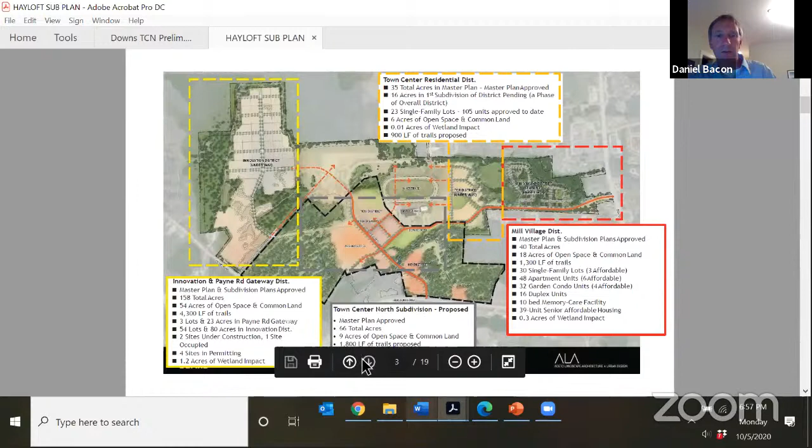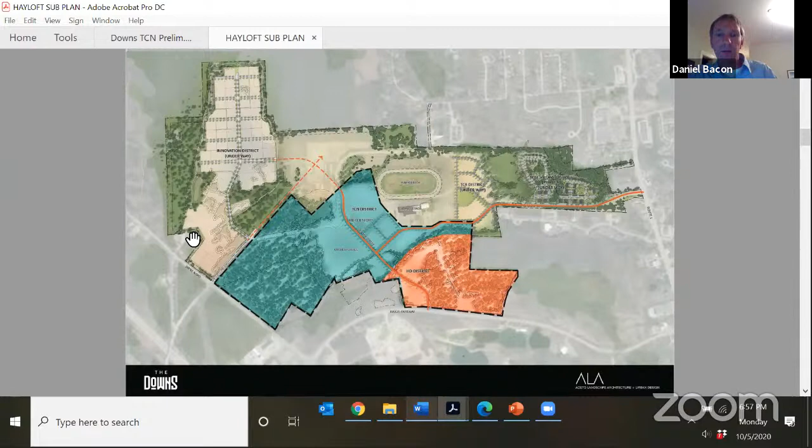I think overall, we're talking about a portion of the Haigis Parkway District Plan Development Area and then Town Center North, like we just talked about. So I'll move quickly through that. This is the conceptual master plan for this area of the project that you saw back last spring and that we talked a bit about a few minutes ago.

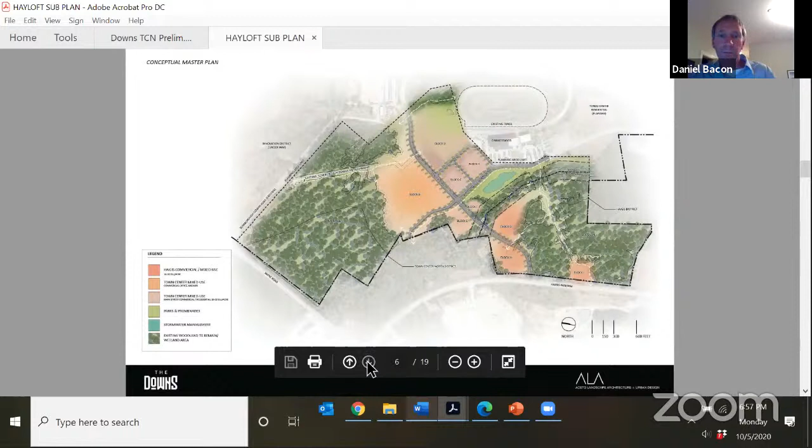Like this project is the case in other phases, and it's really needed as this project moves forward. It's very much a phased approach to everything, given the significant infrastructure costs and the fact that we don't have the entire plan development districts figured out in terms of final design.

So this shows you within the master plan the area we're proceeding with through subdivision, which is a phase of both of these districts, as you know. If you can see my hand, this would be the new Center Street that would be constructed from Haigis Parkway. It would cross this area of the Haigis Parkway district within the Downs. It would provide access to these two lots, 5 and 6.

It would cross Willowdale Brook with a stream crossing here, and then it would come to a new intersection with the Downs Road. So the Downs Road would be extended up from Town Center Residential, which is where my hand is. That's really where it's finishing off, and that's under construction right now. The Downs Road would be extended up generally along the alignment of where it exists today in front of the grandstand, or along at least a portion of the grandstand parking lot and where you think of the grandstand out there. And then it goes off alignment to come up and intersect with Center Street.

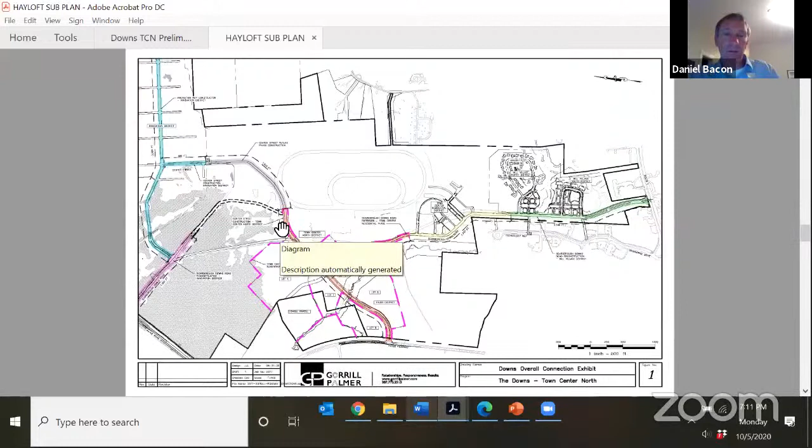So that's the intent here, is to get this far enough to provide that in the short term. We're hopeful we're back in front of the board with some end users in this area sometime in the future to complete that public street. So I wanted to provide that explanation.

So I think with that, I'll turn it to Drew. I think I covered the items that I wanted to cover. And Drew, if you want to jump in on your piece. Yeah, thanks, Dan. Drew Gagnon with Gorrill Palmer, project engineer for Gorrill Palmer and working on the Downs project here. I'm going to be brief, realizing you guys got a relatively large agenda tonight, and you've probably heard this spiel before, but I'm going to touch on the utilities and the stormwater aspects of the project.

So Dan, if you could go down to the utility sheet, I think it's 2 down from where you are. Maybe 1 more. There we go. This is a colored exhibit showing the proposed mains for water, sewer, and electrical that we're proposing in Town Center North subdivision.

Starting with the water main, we're going to continue the 16-inch main, which was recently approved and is under construction in Town Center residential subdivision. We're going to continue that north along the Downs Road and up into the Downs and Center Street future intersection, which is in the middle of those 4 lots that Dan's been talking about.

The water main is going to run northeast along Center Street, up the road towards the outer track where Dan's hand is showing. And at that point, it's going to become a cross-country water main. Now, we've been working closely with Portland Water District on the logistics behind this. And the main reason is creating a looped connection from Route 1 all the way to Payne Road with a 16-inch water main.

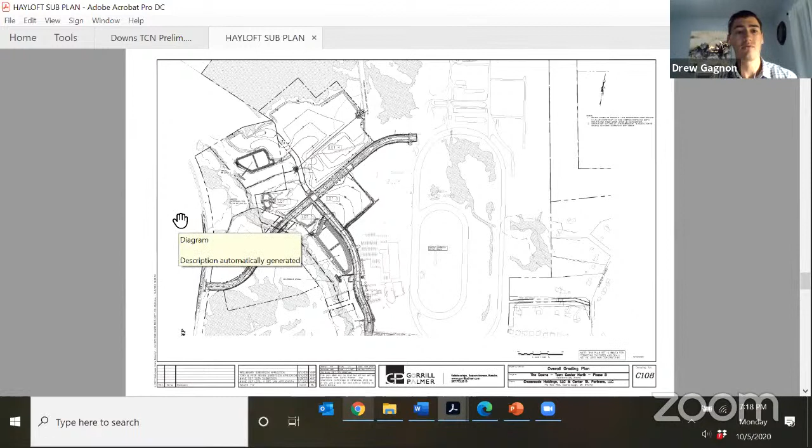I've talked previously, I think back in February or March, about the bypass system we've been working on with the town and DEP. This bypass system takes, during what I'm calling the melting period, November to May, the first inch of runoff, which has high chloride contamination, and we're flushing that around the BMP and directly into Willowdale. That flushes Willowdale with chlorides at one time, versus it seeping into the groundwater and bleeding out into the stream throughout the year.

So we have a system of weirs that will promote the flow either around the gravel wetland, or during what I'm calling the summer months between May and November, where it acts as a normal BMP. The cleaner runoff, the non-chloride, non-salt concentrated runoff, will mitigate with the groundwater in these gravel wetlands and help recharge the groundwater, which eventually gets into the Willowdale Brook. This is consistent with what we've been working on with the DEP and the town to help the Willowdale Brook corridor.

2 additional BMPs we're proposing are grass under-drain soil filter 1, which is right on the side of lot 5. That takes only the Center Street right-of-way, exclusively, just in order to get the road in and get that road treated and stormwater handled.

The second one is grass under-drain soil filters 2A and 2B. I think it's actually really 1 BMP. That takes lot 1 specifically and only lot 1. So that's kind of how we broke it up.

A large drainage culvert across lot 4 is proposed. This culvert is going across the Wex site, and essentially it's taking existing flow from the large wetland north of lot 4, which is a big area - we're talking about 60 acres or so. There's flow down to a ditch that goes to the tributary stream to Willowdale Brook. So we're putting development on this lot, and instead of running it grade-wise with ditching around the site, we're proposing a 48-inch culvert to get that existing flow through the site. That's not taking anything we're proposing, it's essentially just moving the ditch.

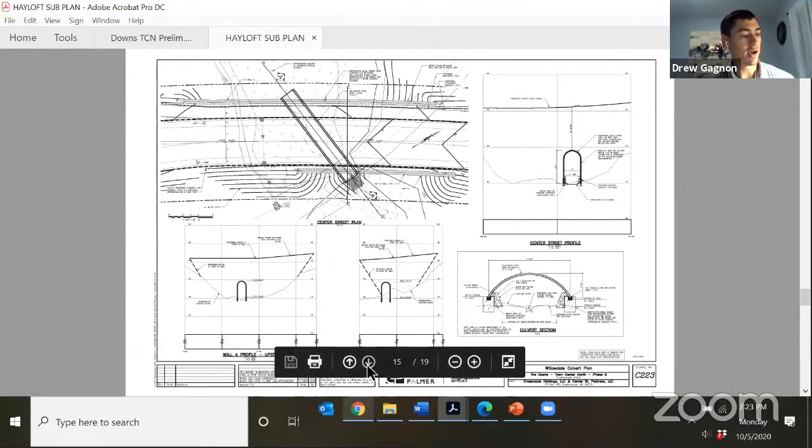Just wanted to give the board and the town an update on the Maine DEP and Army Corps permitting. We've had our stormwater reviewed by a third party, and there weren't any comments, so we feel comfortable with that, and we've been working hard on getting that reviewed in a timely manner. We responded to the first round of comments, and that is right now with the project analyst - we responded two weeks ago, so that's under review for the level 2 portion of this permit, which is essentially a site law. For the Army Corps and NRPA, we responded over a month ago to the first round of comments, and that is also under review. With that, I'll pass it along to Tom Errico - he's going to talk about some of the transportation and traffic engineering we have on the site, and then likely back to Dan. So thank you.

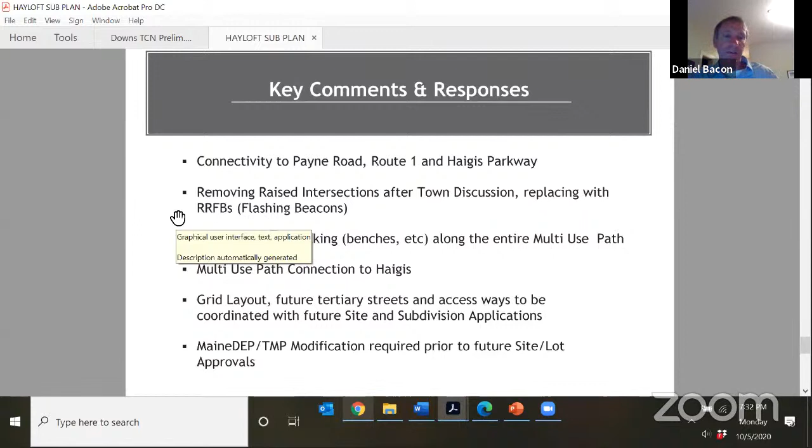I think you covered most of that, Tom, in your presentation. I probably should have switched slides. As indicated, we're in the middle of the TMP modification and are working hard on that with town staff, DOT, and the peer review folks for the town.

So in terms of next steps, we've been talking a while. I want to turn it back to the board. Obviously, ongoing traffic coordination—we're pretty close on Maine DEP with their review, and we're going to have a permit later this month. They're on the early side in November.

The critical path for us is that we're doing this to activate this area of the project and enable WEX to proceed with more site programming. Based on policy and practice, we can't apply for site plan review and progress the WEX site design without a preliminary level of subdivision. So that's a step we were interested in this evening to enable WEX to continue on.

We know we have a lot of things to address that are more outside of the limits of the lots and roadway configuration, and we're hoping we can do that between preliminary and final. So with that, I'll turn it back to the chair and the board for discussion. Thanks, Dan. Appreciate it. Rachel, would you like to start?

Sure. I'm still struggling, at maybe a 25,000 foot level, with the roads—in terms of what's going to happen when. I believe we talked early on about the point at which Scarborough Downs Road would be closed at a certain time, and a new road opened up between Payne Road and the development area.

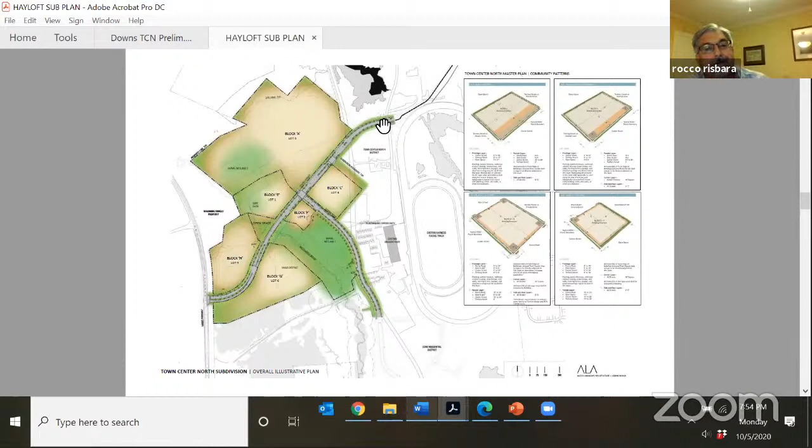Not to say that, if this board or staff feels that a better cutoff is better, we certainly can have a conversation. But we put a lot of time into thinking about how do we eat this elephant, and how do we take it off a bite at a time. I hope I've added some clarity there. I'm not sure I have. Maybe I've just been rambling, but I appreciate you listening to me.

Yeah, I also had a question about potentially, let's see if I can explain this. Does it make sense for you, understanding that you have some other, so it's not just road construction phasing, that you're trying to phase new roads in and older roads out, but certainly the wetlands permitting piece and all of your DEP work comes into play there, as well as you go to transition over this older road into, away from road and over to the path and boardwalk option. So for that short stretch of Center Street between, yep, right there, between those two, I wonder...

Perhaps your phasing plan will help to clarify it, or even seeing it in person. Admittedly, I haven't been out here in a little bit of time, but perhaps having that little connection piece as kind of a future sub-phase of road construction, or waiting to build that until at least the point at which you're closing the current Downs Road to traffic, might help the utilization and mix of existing roads and the roads you have built out to that point not feel like such a dead end. Not such a... and I know in your minds it's not a dead end because you're clearly seeing the connection in the future.

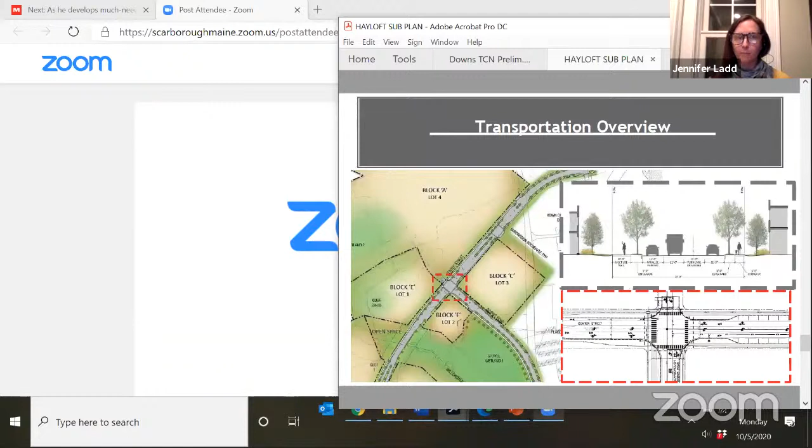Beyond that, I checked what the AASHTO and FHWA guidance is on multi-use paths, and there's definitely strong language that speaks to a minimum of 10 feet for a variety of reasons, all of which I know your team is aware, but for others on the board or any public listening in, that generally has to do with the nature of multi-use. So if you picture someone walking, a dog passing, someone on a bike with a trailer, or any combination of the varieties of ways that we get around and use those trails, it really does require more than 6 feet.

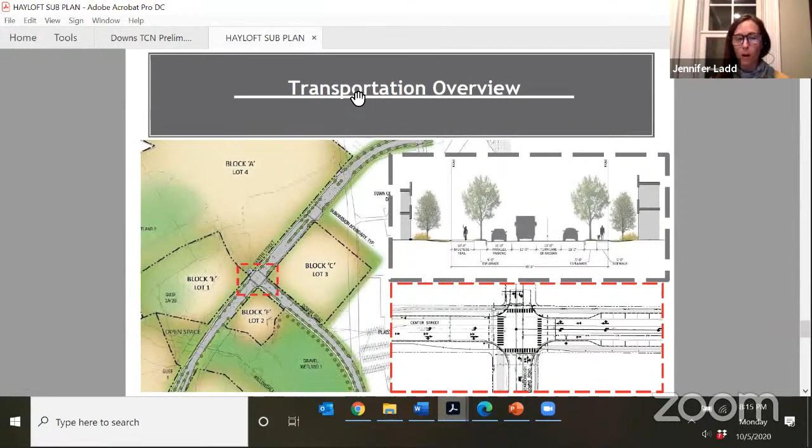6 foot, actually, I read somewhere that 6 foot is the recommended minimum for a one-way facility. And so I would just urge you to continue to look into options to achieve an 8-foot minimum width path where possible, if at its narrowest, 10 foot anywhere else that you're going to be calling that a multi-use path. And then, similarly to some of the traffic projections you've looked at for the roadways, if this is intended to really be an area that encourages by design a variety of modes of transportation - anybody on foot, anybody in a wheelchair, on bikes, strollers, scooters, who knows what - and on top of that, we're envisioning a lot of those people.

10 feet wide might not even be sufficient. These paths, just like roadway build-outs, get expensive the wider that you construct them. But I would urge a look at preserving space for that if we get to that point, which would be wonderful. And if not, just really seeking at the very least that 10-foot width, because I think it's really important.

I think a lot of people are going to want to do that here. I wouldn't even say that if I didn't think this was an area that would be desirable, but I think the rest of your development program and the other cues from infrastructure that you're building and investing in are going to lead people to want to do that.

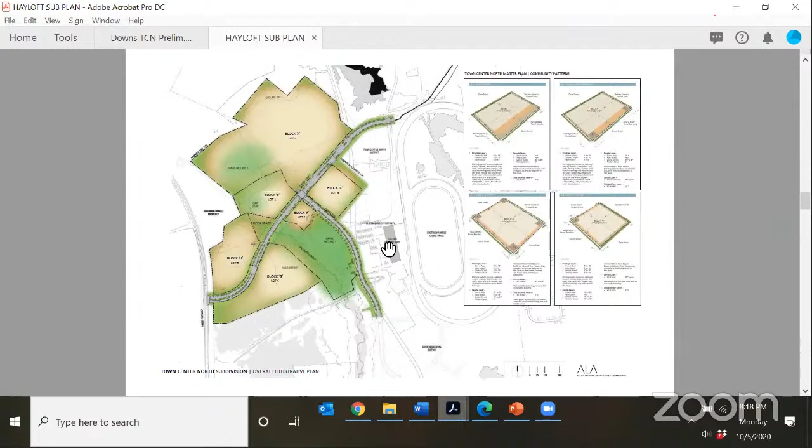I actually thought the applicant did a very nice job explaining what their plans are. I understand what they're trying to do. I think they're fortunate that they have the current Downs Road and the Paddock Road that they can utilize during the construction phase. And I'm not a technical expert like Jen is, but everything seems to make sense to me.

I don't think it's going to be a big problem, that little extension from the existing Downs Road up to the Paddock and then transitioning to the Paddock Road. I just don't think that's going to be an issue. And if it were to be an issue, they could just not develop that little stretch right there as it would be in its final stage with all the landscaping and everything. But I don't know, I think they've done a good job, a thoughtful job, and taken advantage of the existing roadway system to work around everything.

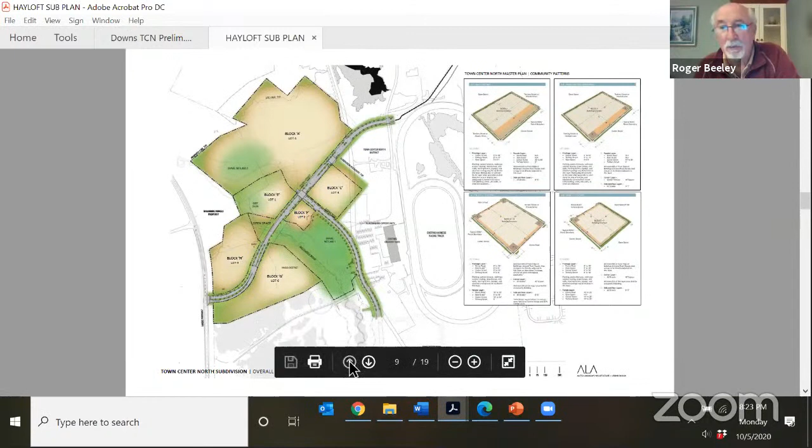So okay, right now though, I mean, I can see from a business point of view, from a business standpoint, it doesn't make economic sense to do it right now until you have something there to be developed. So I guess...

So they are proposing to make a connection, and it's going to be a private connection, not built to street standards, which they've explained why they want to do that, because they ultimately see in the final analysis that there is going to be a more fully developed road.

So all I'm suggesting at this point is we just want to be sure that the town has a good understanding. I think it was the questions that maybe Rachel or Jen were raising about, okay, when in the final analysis this builds out, and it's sort of the town's job to... what the board has before you is this application.

So if nothing else were to go forward, and that's a very unlikely scenario, totally get that, but what would that connection between the end of Center Street here look like, and how would people get up to Payne Road? We generally understand what that connection is, and really it's just about the details. As you sort of said, you're not the details guy, so that's sort of what our questions are more poking at, really, is the details, less the overall concept.

Well, I guess I don't understand. So what are we requiring them to tell us then at this point, what that connection along Paddock looks like? They've already indicated what they expect to happen. I don't understand what we have. I'm missing something then, no?

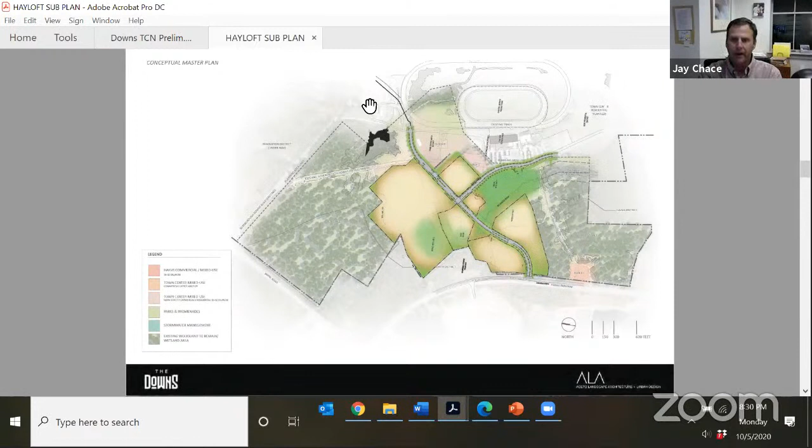I think that speaks to why we need to do the analysis of what the full build out is, so we know what we're headed towards, not take it site by site - to understand what those full impacts are and how we incrementally get those improvements. We've talked about saying, okay, when we hit such a threshold, these things need to happen, hit another threshold, maybe these other elements come in. We don't want to be building for one level and then taking a whole different course down the road. So certainly complicated, without a doubt.

All right, I'm going to give Rick a quick minute here, he hasn't gone yet, but I do want to try to tie this up a little bit. I think Rachel and Jen did a really great job, and Roger as well, so I don't have a lot of questions. Moving forward, I'd like to talk a little more about the placemaking and the culvert, but I think those are all good for now. So I will yield my time back to the chair. Thank you, Rick.

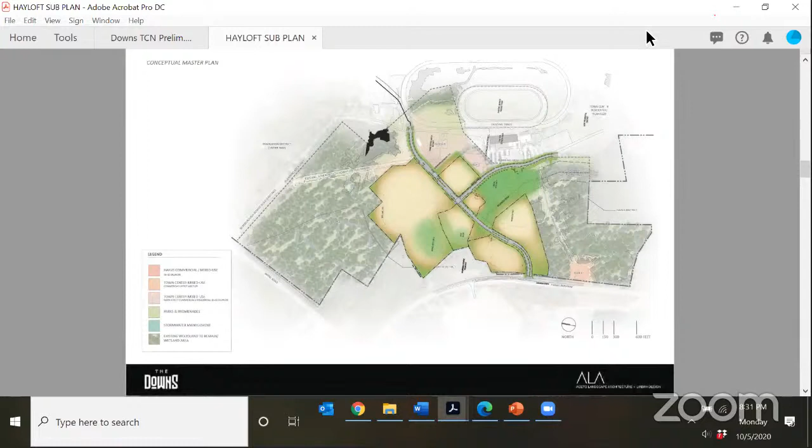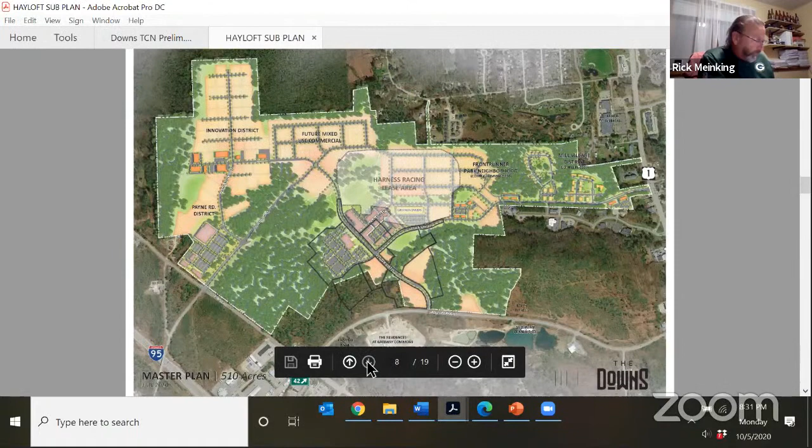I just had one quick question on gravel wetland 1. I see a curb cut, and I'm just wondering what that's going to lead to. You know where I'm talking, Dan?

Yeah, there's a planned curb cut that goes to lot 2. Below gravel wetland 1, we're anticipating a future pump station in that location, and we wanted to show the curb cut now to provide access to it.

And then for access into lots 5 and 6, are you planning on doing that somewhere around where that crosswalk is? Yeah, there's a 4-way intersection proposed just to the high side of that crosswalk, where we're showing access to both of those lots. Okay, that's all I had. Thanks.

So I don't want to jump into a lot of the stuff we've already discussed. I think there's been a lot of good feedback, and a good presentation from the applicant was very helpful. I know you're asking for preliminary subdivision approval this evening. For my two cents, I'm not quite sure we're there yet on tying up the details, but I'm open to anyone else on the board if they feel this is ready for preliminary, or if they'd like to see it one more time. I see a nodding head or two.

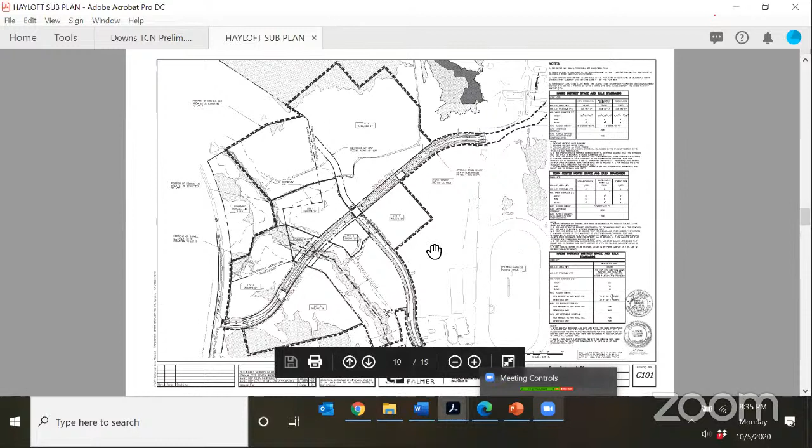Okay, seeing no public comment, I will close that. All right, Dan, Rocky, thanks for giving us this. Good luck, I guess we'll see you shortly with some more detail intact. Thank you. Okay, thank you.

All right, next item on our agenda this evening is Joy Real Estate of Scarborough LLC, requesting a site plan amendment review for 260 US Route 1, Assessor's Map U43, Lot 42. Jay?

Thank you, Mr. Chair. This is an application for the reuse or repurposing of an existing building at 260 US Route 1, just across the street from Town Hall at the corner of Ward Street and Route 1. The applicant is seeking to renovate the existing building to accommodate a mix of uses: first floor proposed as a dental office, with two dwelling units on the second story.

This application was actually on the board's agenda back in September, but got tabled due to the lateness of the hour. But they were able to respond to some of the staff comments, which really helped reduce and modify our memo to you this time around.

Some of the primary elements remaining are discussion around the joint use of parking spaces, where you have a mix of uses on a site. The planning board can approve the utilization of parking spaces by the two uses, so long as they have different time needs.

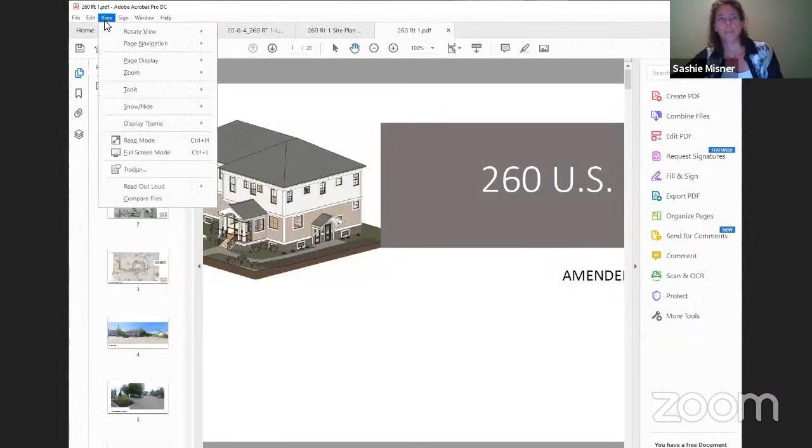So as Jay said, we were on the planning board agenda last month and we got kicked off. So we're really happy to be here tonight. Appreciate that we made it on. We would be looking for approval from the board tonight.

We were fortunate to be able to resubmit and readdress some of the comments. So we're hoping that we've addressed all the comments that are out there and that the board is comfortable with what we're proposing. The site, as Jay said, is directly across the street, so I'm sure you're all familiar with it. I'll just give a little bit of background.

You can see that it's fully developed. The previous use was a church, so the owner is changing the use for office space on the first floor and two two-bedroom units on the second floor.

As you can see from the aerial image, it's completely paved right now. So the owner is going to be doing upgrades to the building as well as improvements to the site itself.

We have Bessie Square on the west side. We have the parking lot on the south. There's businesses all around, so what's being proposed is appropriate.

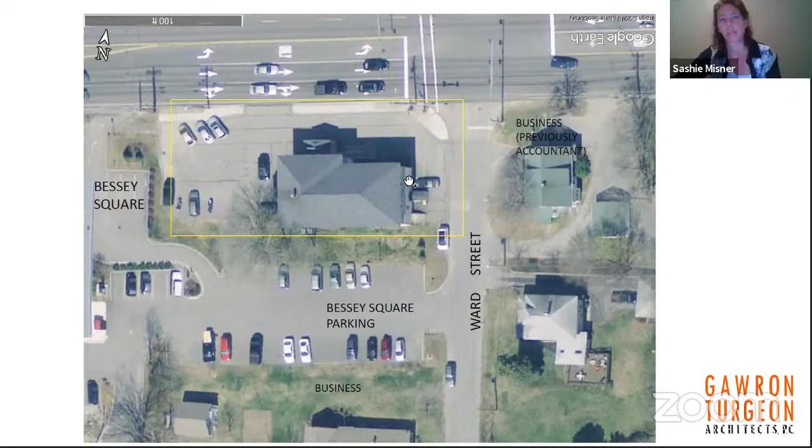Here you can see the utilities are all on - we have overhead electric on Route 1, and then we have all of our utilities coming in off of Ward Street. So everything is there. We're maintaining what's existing.

You can see the extent of the pavement. One big thing right now is that the circulation is a little abstract, so there's no real clear parking spaces. There's excess pavement, which makes it difficult to understand how to use the space. So we're trying to improve the site in that respect.

They have a little bit over a 30-foot curb cut along Route 1. They have an opening along Ward Street. And then they have an easement through Bessey Square to get to the property.

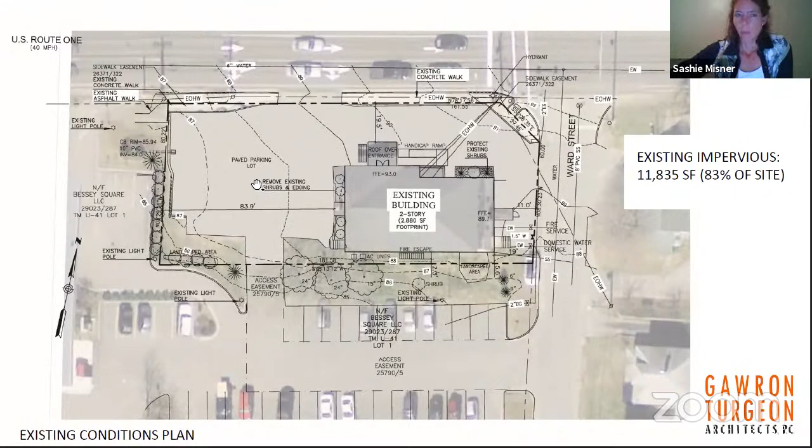This is just showing the access through the easement area here. It's about, I think, 18 to 20 feet wide. And this would now become pretty much the primary exit from the site.

We're trying to improve the circulation through this entire area with our improvements. So this is what we're proposing: we are removing the large curb cut with in and out access, so now it will be only in access. Originally we had a 15-foot wide entrance here, and staff asked us to reduce it to 12. So we're now showing a 12-foot wide access, which works well.

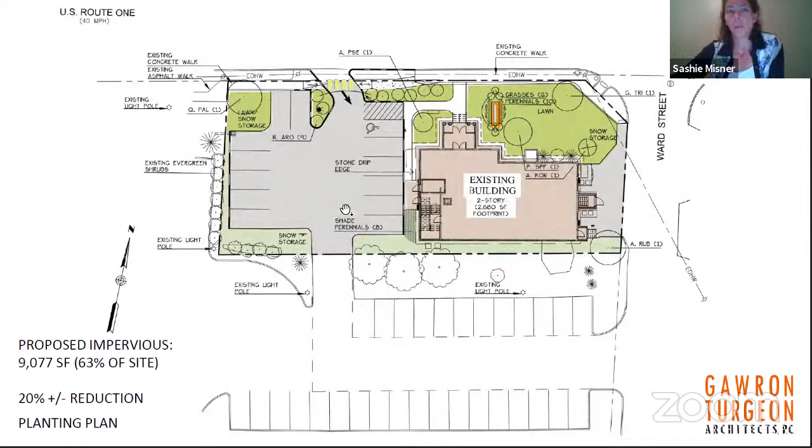And just to point out that we did remove all of the pavement up in the front of the building, so we no longer can drive through here and out to this space. We reduced the pavement about 20%, so we were really happy to be able to do that.

And I'm not sure what the town was thinking we would do there. That's for discussion, I suppose.

As far as plant materials, we did add another tree. We're showing a pin oak right here, which is this tree, and a flowering cherry right in front of the building, which is this variety. We've added a locust at this corner.

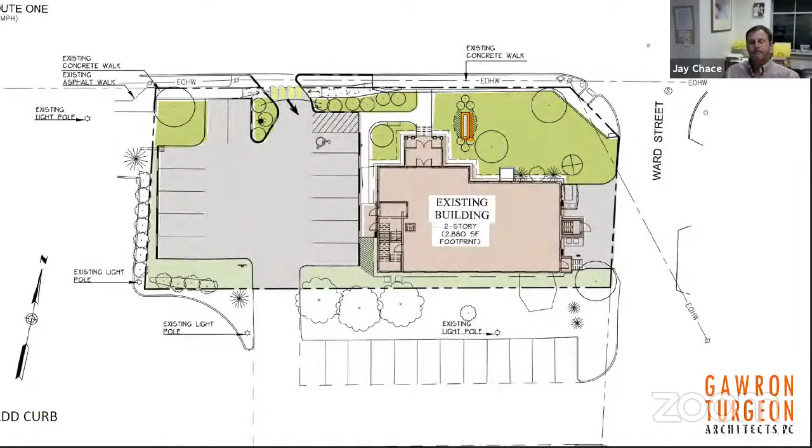Okay, I do have one question. Reading from the Woodard & Curran comments, it said we've been looking for the easement for this catch basin, and there is no easement recorded for this property referencing this catch basin drain. I'm wondering what's going to be required if we're not able to track anything down.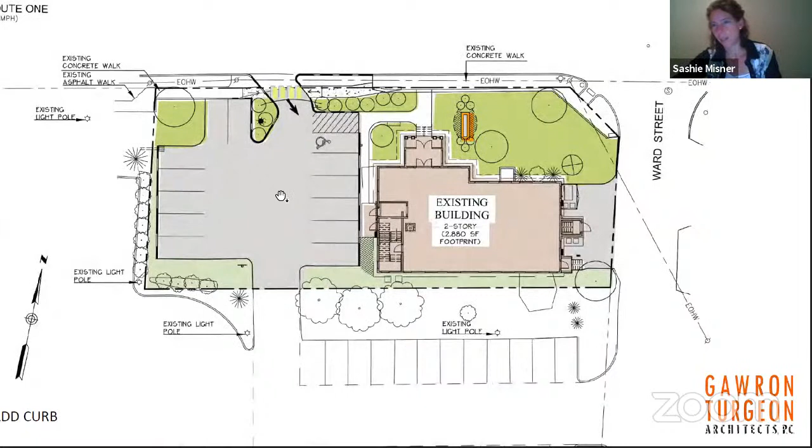I've reached out to the engineer who did the Bessey Square project, because it looks like, yeah, right here, in 2006 this is what this property looked like. There was no catch basin, no curbs or anything. Bessey Square went in, and you can see where they cut the pavement around and installed the catch basin when Bessey Square was constructed.

So this was part of the Bessey Square project, but I have no record of it. I'm trying, in the most economical sense, to figure this out — the applicant has to pay a lot of fees with this project, traffic fees and all kinds of things, so I'm trying to find the most economical way to get him approval and satisfy everything.

So this is the one thing I haven't been able to find yet, and I haven't been able to talk with the civil engineer, but I've reached out to him. I'm hoping to get some clarification, but I haven't seen an easement in the Bessey Square documents, so I'd like to understand what's going to be the requirement for that.

Yeah, do you have any insight on that? I guess my thought is, going back to the Bessey Square proposal and approved site plan, if they were proposing that connection and proposing that grade.

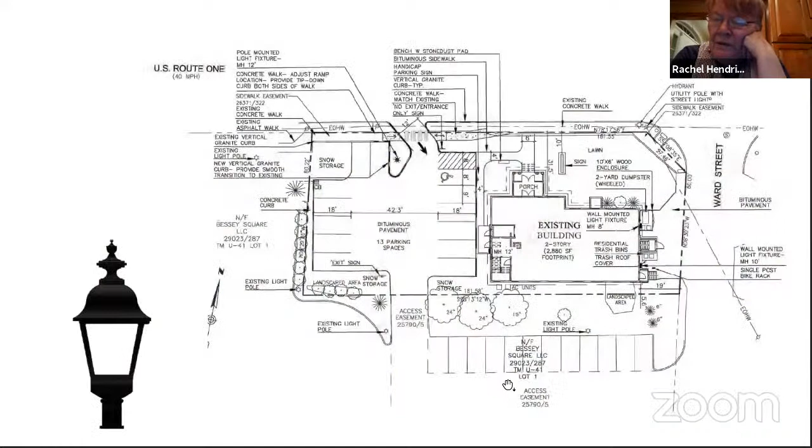While I'm very sympathetic to your desire to save the applicant money, there's actually a fair amount of disturbance going on, because as you pull up the asphalt and then put loam and seed it, there's a possibility that something could go wrong in terms of where the water is going to be flowing. And repaving the parking area, changing the entrance - when you think about it, it's actually a fair amount of construction work on the surface, but it can have an effect on the pattern of water flow. So I would say I think you need the engineer.

Thanks, Rachel. Roger.

Well, I think I'm having a bad night because they're going to take up the paving in front of the building and seed it. So to me, there's going to be less runoff going into the catch basin. So from a logical point of view, if there hasn't been any problems so far, I would think there wouldn't be any problems if they removed more pavement.

But I understand the town's desire to have something official for the town's protection. I brought it up simply because it was in the staff's comments. So I don't know what to say.

All right, from a logical point of view, Jen, you got a thought on this? It'll be a problem. Pardon me? I'm gonna ask Jen for hers while you think about it.

Having done similar calculations myself, it's pretty hard to imagine that a 20% reduction in impervious area would have an adverse effect on the offsite drainage here. But I also know - I can appreciate lessons learned on behalf of the staff.

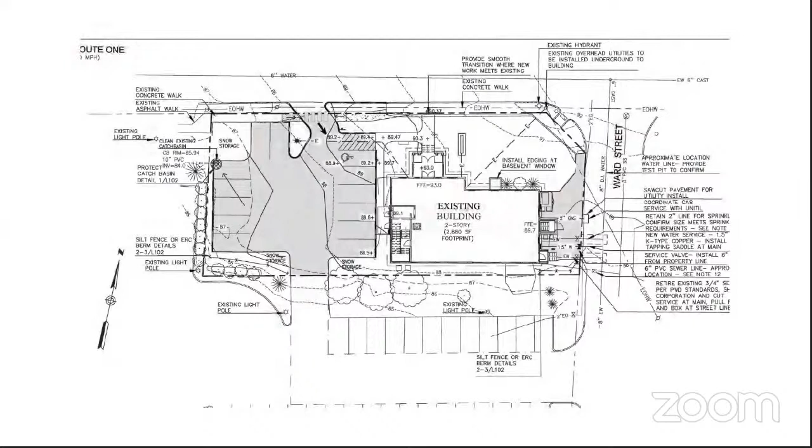For what it's worth, I'm comfortable with just creating a condition of some sort, rather than having the applicant come back with the information. I think if we have some sort of process vetted out with staff involvement, that way they can still avoid the extra trip here. And staff, of course, would be able to elevate it back to us if there was something that they found that wasn't what they wanted.

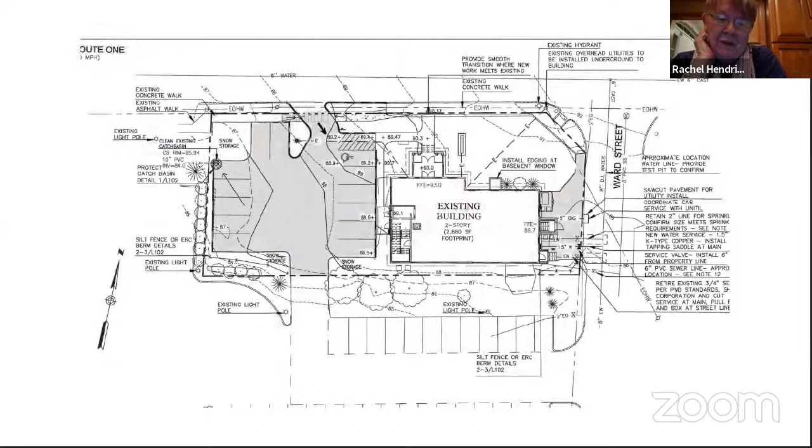Yeah, this is Rachel. I have no problem with having just a condition of approval in there that the staff sees something that makes them comfortable, and they can figure out the wording that ensures that the town has some protection. And if there is a problem, come back to us, and if there isn't, it just simply moves forward.

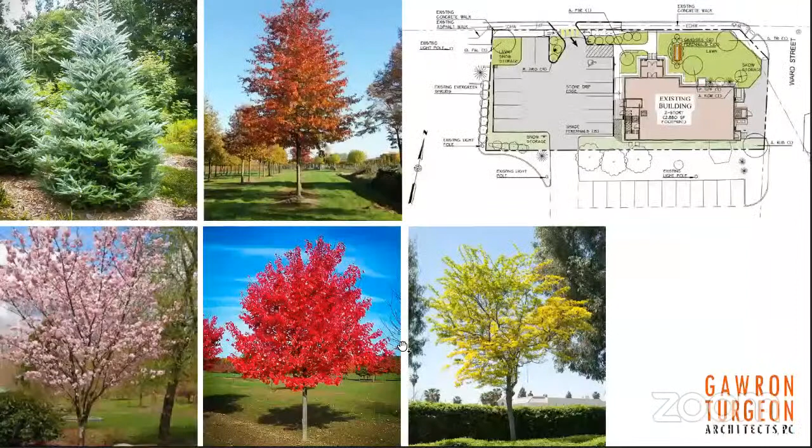And then as far as weighing in on what we need to see, Jay, we're not really asking for a full stormwater model here. We're just really asking for an engineer to check it out and say, yeah, we don't think that we're going to have an adverse impact on stormwater, right?

Yeah, I think it can be that simple of a statement. And I think that's a reasonable request in my world. From where I sit, that's a reasonable request to have to comply with it. So I would say get Steve Bushy to write your letter.

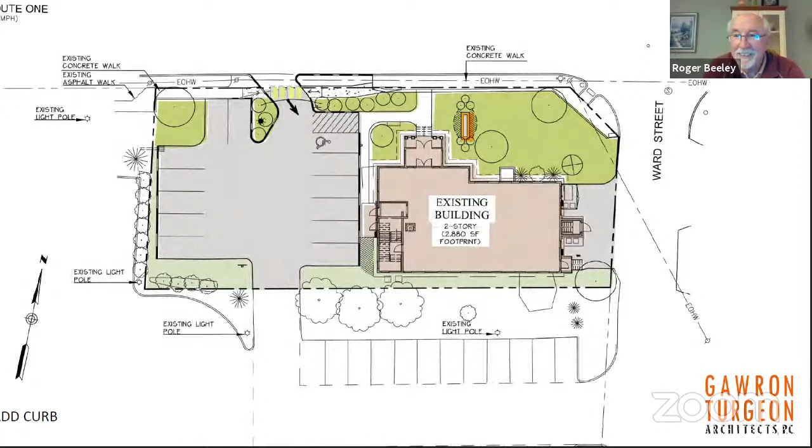So, the rest of the board okay with that solution? I agree, Nick. Thanks, Rick. Yep. Okay. All right, Jay, you got this motion?

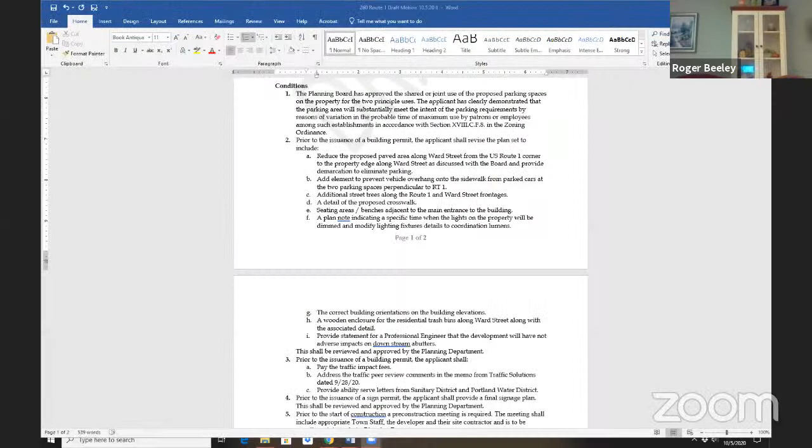I do have one I can share. It's going to overtake Sashie's, so bear with me. Are you seeing what I hope you're seeing? Okay. All right, I move to approve the site plan amendment titled 260 US Route 1. It is not there anymore. I'm not sure what I did there.

How did that happen? It's back. All right, I move to approve this.

Okay, it's back. I move to approve the site plan amendment titled 260 US Route 1, as depicted on the plan set prepared by Gawron Turgeon, dated 9/21/20, with the following findings, waivers, and conditions.

Findings: the applicant is proposing to renovate the existing building on the property to accommodate a dentist office on the first floor and 2 residential apartment units on the second floor. The proposal also includes additional landscaping provisions along the property's Route 1 frontage. The property is located at 260 US Route 1, will utilize existing frontage, and is located within the Town and Village Center transition TVC 2 zoning district.

The planning board has reviewed the application and supporting documentation and finds that the proposed design of the site plan adequately addresses the site plan review and zoning ordinance requirements for site utilization and layout, access, internal vehicular movement, parking, pedestrian ways, landscaping, stormwater management, lighting, architecture, signage, utilities, and storage.

Conditions: 1, the planning board has approved the shared or joint use of proposed parking spaces on the property for the 2 principal uses. The applicant has clearly demonstrated that parking will substantially meet the intent of the parking requirements by reason of variation in the probable time of maximum use by patrons or employees among such establishments, in accordance with section XVIII.C.F.5 of the zoning ordinance.